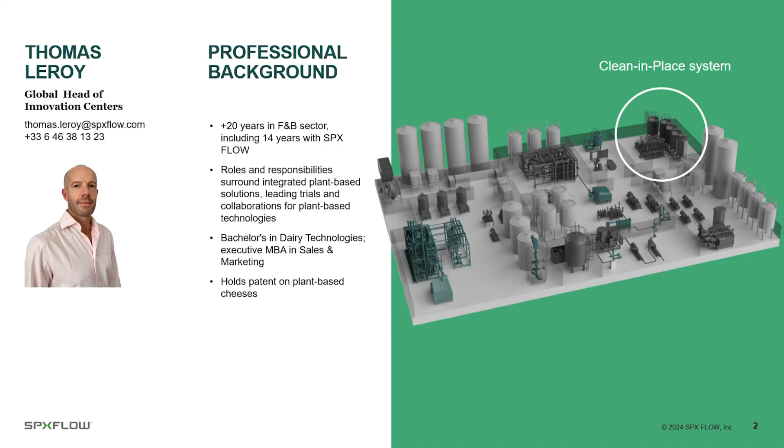More globally at SPX Flow, our purpose is to improve the world through innovative and sustainable solutions. We'll strive to follow this purpose during today's presentation by addressing the challenges in plant-based processing, the basics of clean-in-place systems, key cleaning parameters focusing on sustainability aspects, monitoring of clean-in-place systems tailored to customer needs, the importance of integrating proper cleaning practices, and a final question and answers session.

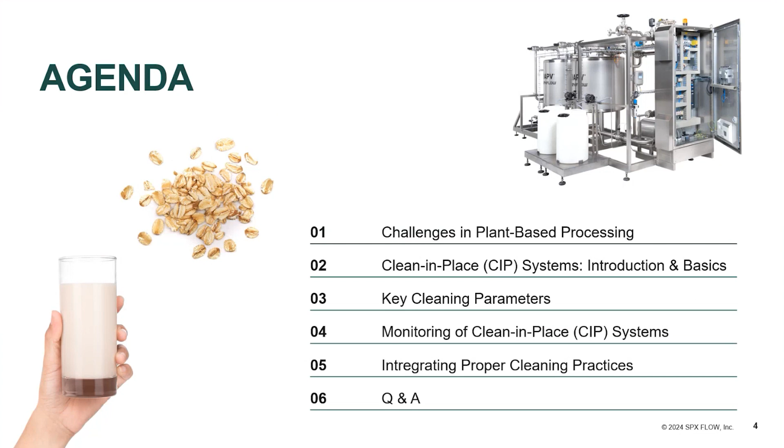As an example, we can consider the overall process for oat-based beverages, starting from growth. There are several processing steps, and every single piece of equipment must be cleaned in an efficient way to maintain optimal production performance while ensuring proper hygiene of the installation and product safety. Cleaning concerns product transfer lines, tanks and mixers, heat exchangers, valve clusters, and all the others.

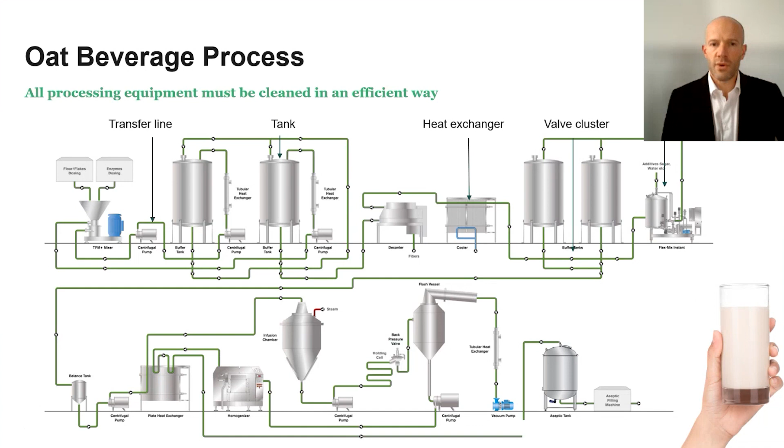While we are here, I want to highlight that we at SPX Flow are original equipment manufacturers that can cover most of the processing steps described in the previous webinars. For some specific equipment that is not part of our portfolio, we have the right partners to supply a fully integrated line to meet your plant-based needs. We also have specialized testing centers all over the world to support you in designing, developing, and perfecting your manufacturing processes.

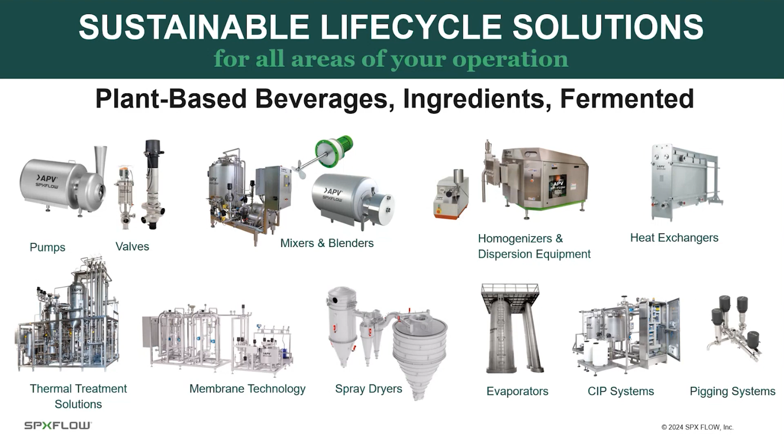But how is cleaning an integral part of the challenges in plant-based processing? If we focus on plant-based beverages, also called milk alternative beverages, the purpose is to be as close as possible to cow's milk in appearance, taste, composition, and consistency. It is the same for cheese analogs or meat analogs.

But if there is one cow's milk, or more broadly one animal's milk, there is a diversity of plant-based raw materials, all different in composition, especially sugars profile, protein, and fiber content. Processing lines must be adapted to all of them, which may cause high manufacturing costs. The diversity of raw materials increases the complexity in terms of regulations, allergen management, cleanability, and sustainability, as these processes use a lot of water and energy.

SPX Flow is here to support you on all these challenges with our know-how, with our people who have expertise in tackling those challenges.

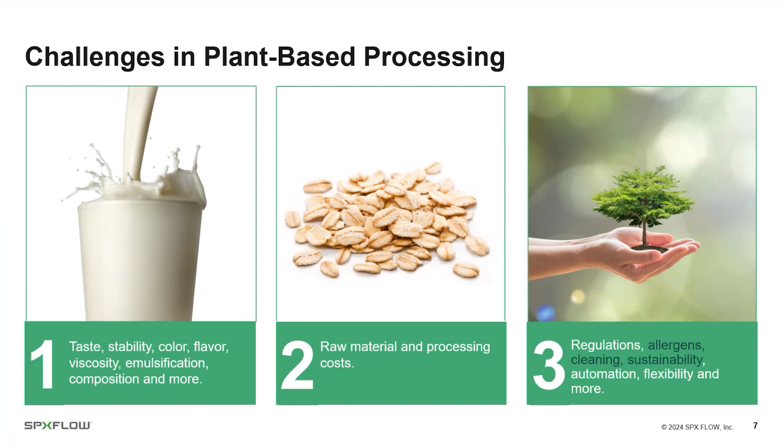As said previously, the central clean-in-place system, let's call it CIP system, is the heart of the food and beverage plant. CIP is a set of automated activities conducted to properly clean all or part of a process system as it sits in place, without removing or disassembling piping or equipment to accommodate the cleaning. A CIP system is basically made of tanks for cleaning solutions, piping with pumps, valves, heaters, and sensors.

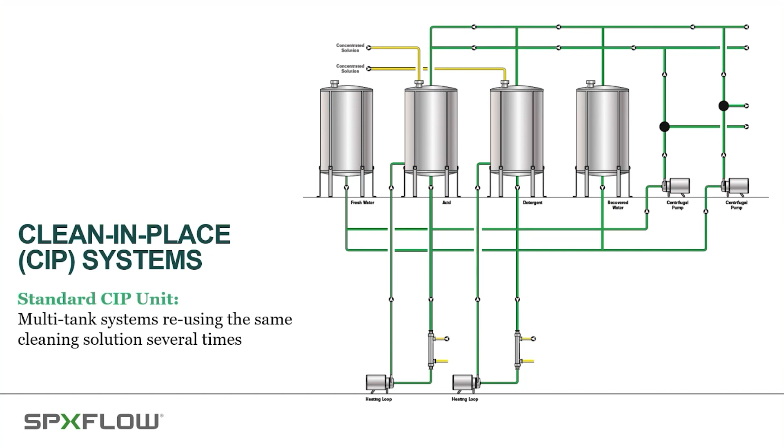Let's go into details about CIP systems, starting with some basics. Cleaning is inevitable in plant-based and other food and beverage industries, as it helps remove residual product or biofilm from processing lines and equipment using turbulent cleaning fluids. It also guarantees proper hygiene of the processing lines by preventing contamination, ensuring food safety and product quality, while maintaining overall optimal production performance.

Clean-in-place applies to closed systems: tanks, piping, and associated equipment as previously listed. The cleaning solutions are directly applied and collected in a controlled way. The equipment should be cleanable without the need to be disassembled, and should be designed to be properly cleaned, meaning that all areas must be accessible to detergents at defined parameters.

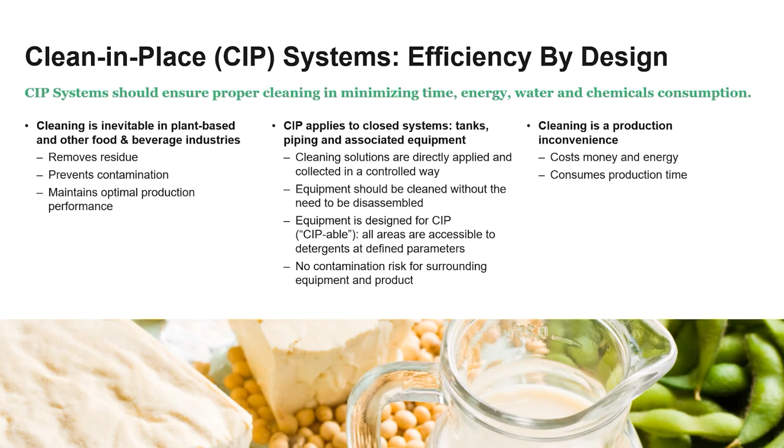In food and beverage industries, it is obvious that cleaning is a production inconvenience, as it costs money and energy and consumes production time. So the CIP system should ensure proper cleaning while minimizing time, energy, water, and chemical consumption. Said differently, cleaning efficiency is determined in terms of cleaning results and savings achieved: energy and water saved, time saved.

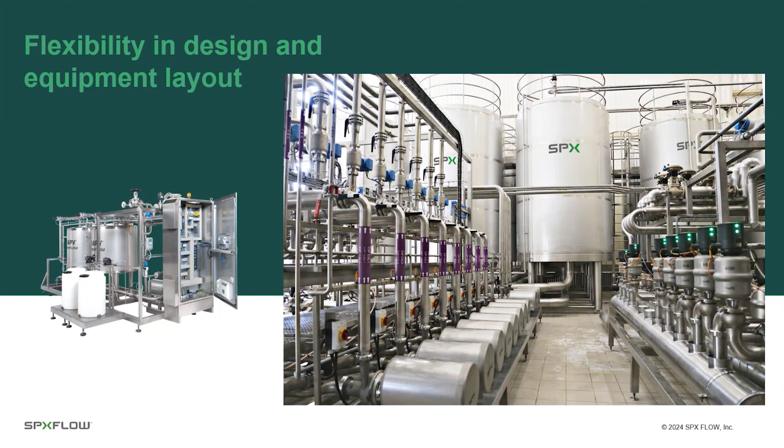Cleaning is achieved through a combination of chemical effect, by the action of detergents at a given temperature for a given time, and mechanical effect, by the force of the fluid removing dirt from the surface.

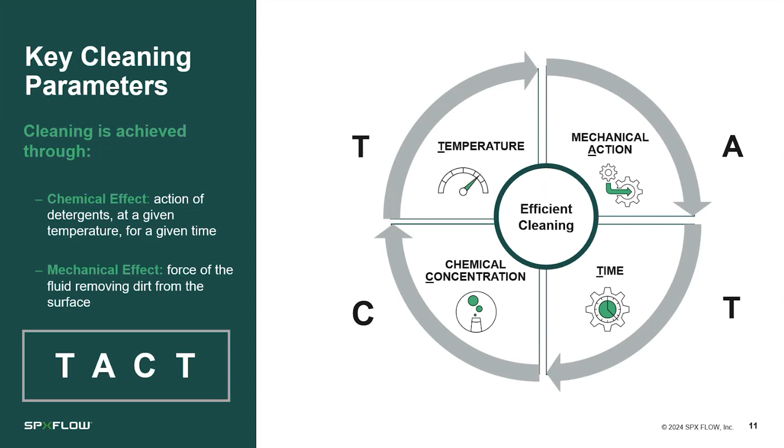The combination is well known by the acronym TACT, as these parameters are continuously controlled by efficient sensors installed on the piping going to and returning from the equipment to be cleaned.

This guarantees supply of the detergent or rinsing water at the right temperature, flow, concentration, and time. To have efficient contact of the CIP solutions on the surface of the equipment, it is important to have the right pumping and heating devices plus efficient valves with control units to prevent any leakage. SPX Flow can offer you the best equipment possible here.

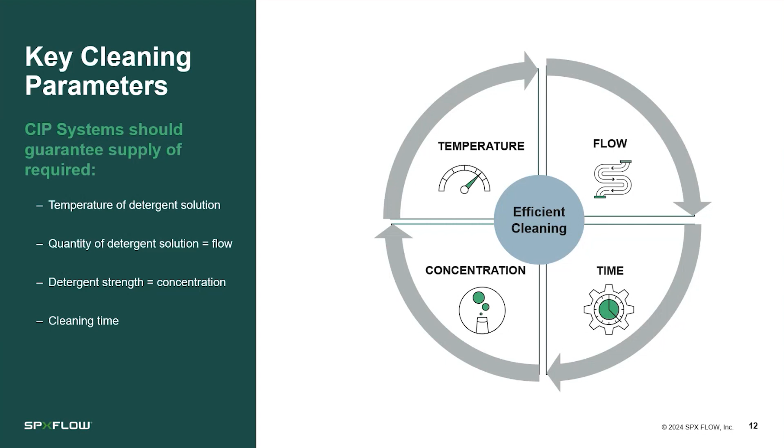In terms of concentration, new types of photometry sensors have been developed recently based on UV absorbance or fluorescence to optimize rinsing water use, as traditionally the CIP process involves several steps, including pre-rinsing to remove most of the remaining dirt.

Pre-rinsing is a very important step in the CIP process to make the rest of the cleaning cycle predictable and repeatable.

Then detergents are used to remove adherent dirt and minerals with one or more detergent solutions. First, alkaline solutions in the range of 75-80 degrees, then acid solutions at 55-60 degrees. Subsequent rinsing phases with fresh water are necessary to rinse out remaining dirt and detergent residues.

Final sanitation with hot water or steam sterilization can be required before production and can be integrated as the final step of the CIP sequence. All these steps are defined according to CIP recipes and automatically controlled.

The amount and quality of water used during rinsing phases is critical to sustainability, as the new kind of photometry sensors previously mentioned are able to analyze suspended and dissolved materials and allow advanced water quality measurement technology, contributing to overall cleaning efficiency.

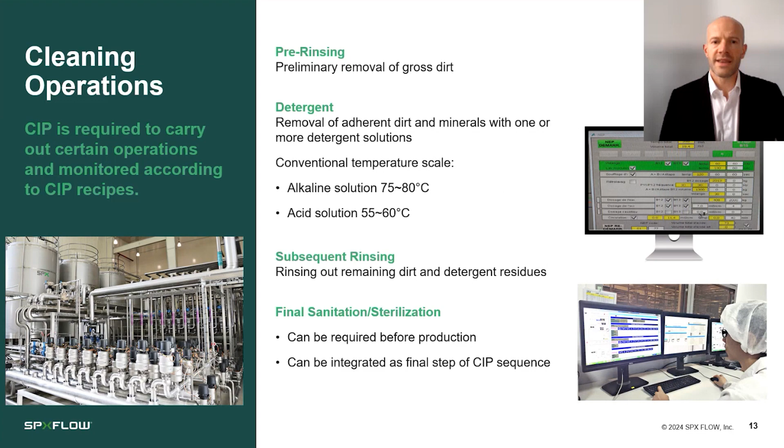But the most efficient way to save rinsing water is to reduce the residual quantity of product in the pipes at the end of production by using scraping systems, also known as pigging systems.

At SPX Flow, these systems are called rapid recovery systems, as they allow recovery in a rapid and efficient way of the residual product adhering to the pipes, reducing product losses and making pre-rinsing more efficient.

As a consequence, rinsing water and chemicals usage is significantly reduced. It is the same for overall cleaning time and changeover time, increasing uptime for production.

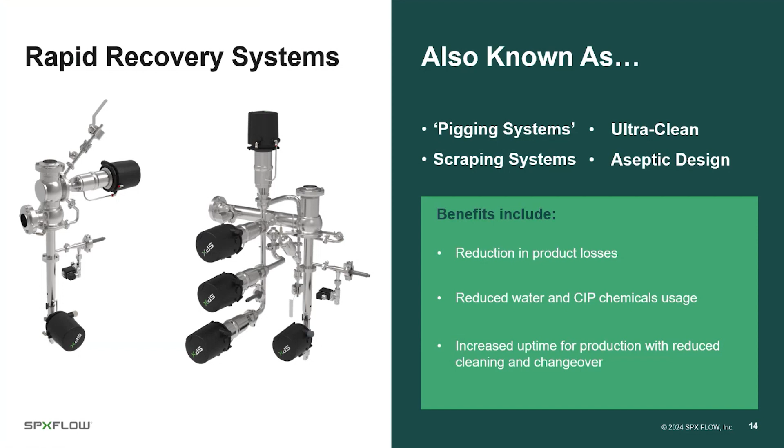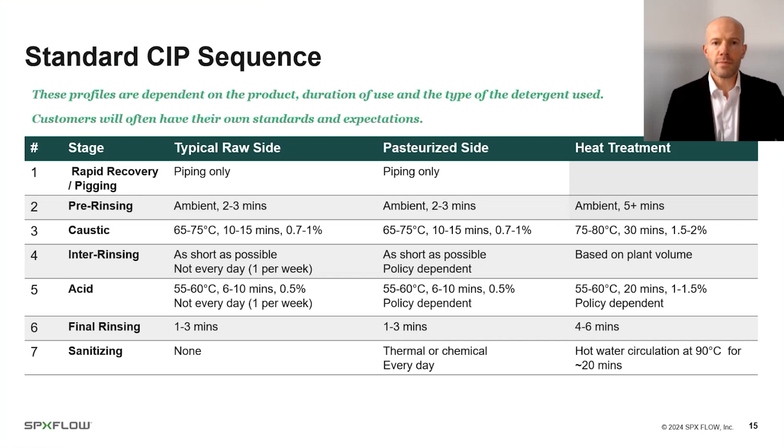Monitoring CIP is simplified with a tool called CIP Expert at SPX Flow. CIP Expert is a proprietary software developed by SPX Flow to control the cleaning sequences. CIP Expert is an extension of Factory Expert, an automation MES system supporting the entire plant, tailored to customer needs.

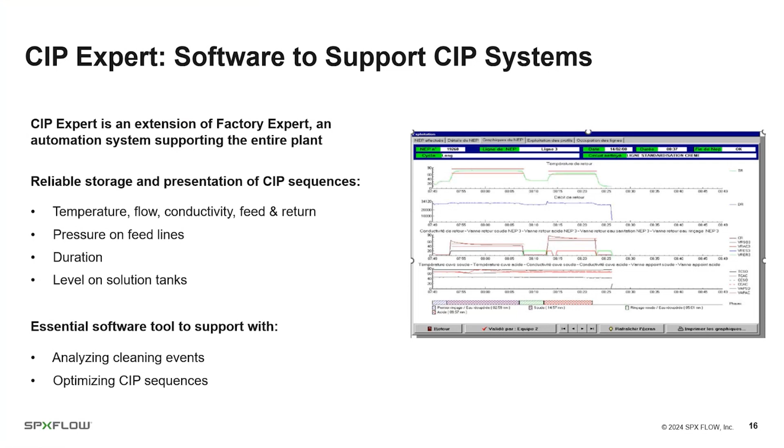CIP Expert allows the reliable storage and presentation of CIP sequences and allows the analysis of all cleaning events so as to optimize CIP sequences. But before defining CIP sequences, it is essential to ask the right questions before designing a CIP system so as to have the best optimized cleaning possible.

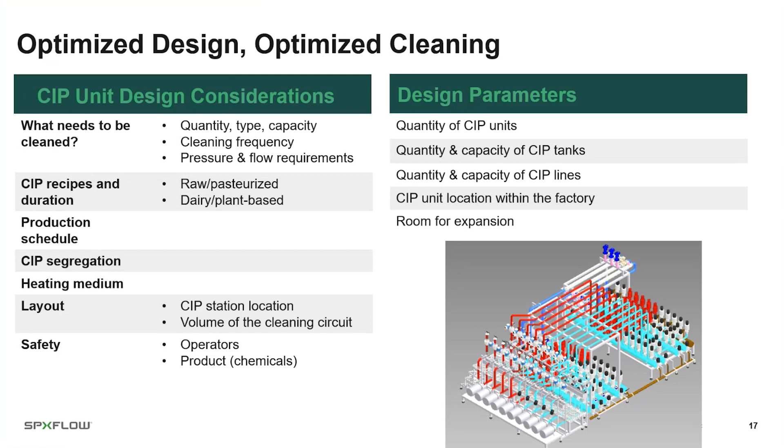Listing the equipment to be cleaned is the first step to design the proper size and location of the CIP systems, without forgetting the future expansion of the plant.

It is also very important to list the different products made in the plant, as the segregation of the equipment to be cleaned is crucial, so as to prevent contamination risk through the CIP system.

In many cases, raw product circuits are cleaned separately from pasteurized product, with different CIP tanks or different CIP systems for the biggest plants.

Segregation of processing equipment is key for plants making both dairy and non-dairy products, due to the major constraint of allergen management and cross-contamination risks.

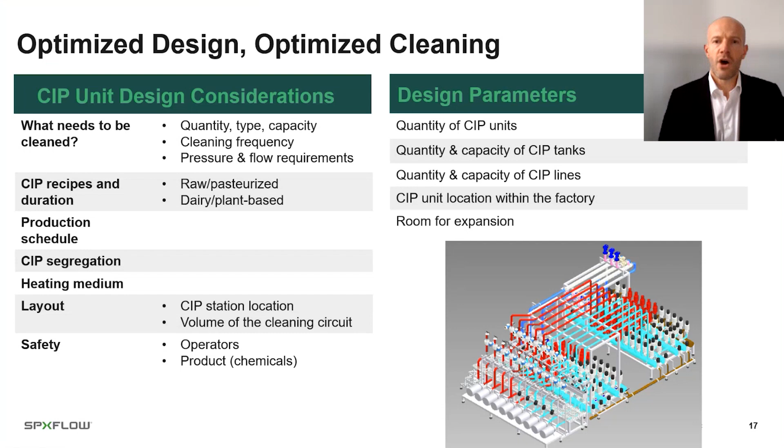This is also the case in plant-based factories processing different raw materials. This highlights the central place of cleaning at the heart of all considerations within plant-based processing.

The variety of microbes present in plant-based raw materials is high, and spore-forming bacteria or fungi are the major safety risks.

In most cases, a proper cleaning ensures food safety, product quality, compliance, and consumer trust.

SPX Flow has significant experience in these major topics that revolve around cleaning in plant-based processing. We will be happy to have further discussion with you on these topics.